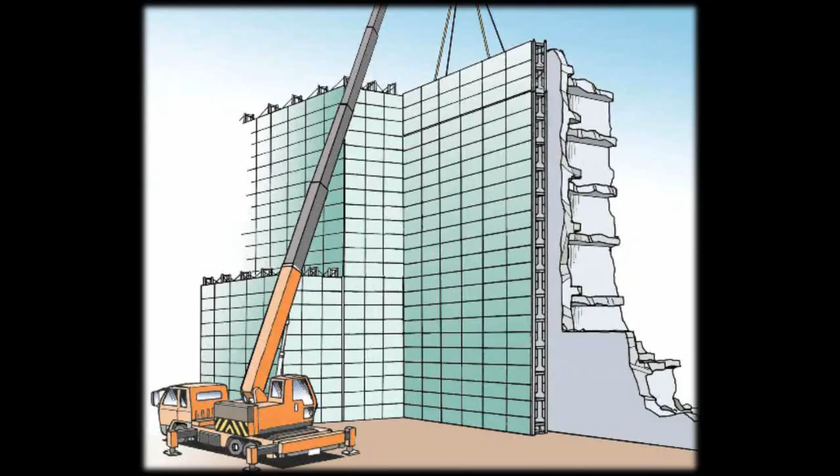A fall from scaffolding during work to disassemble framework scaffolding for protective covering. Accident or disaster situation. This is an example of an accident that occurred during work to disassemble scaffolding in the demolition of a plant.

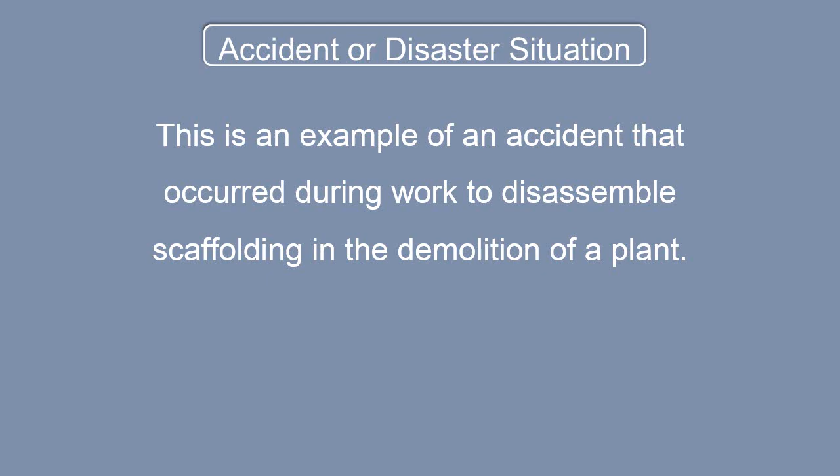During work to disassemble framework scaffolding for protective covering in the demolition of a waste incineration plant, the external connecting pin did not come out when lifting a 2-level 6-span unit with the soundproof panel kept installed on the outside. When the victim went to remove the pin, the last pin came out and the unit sprang up.

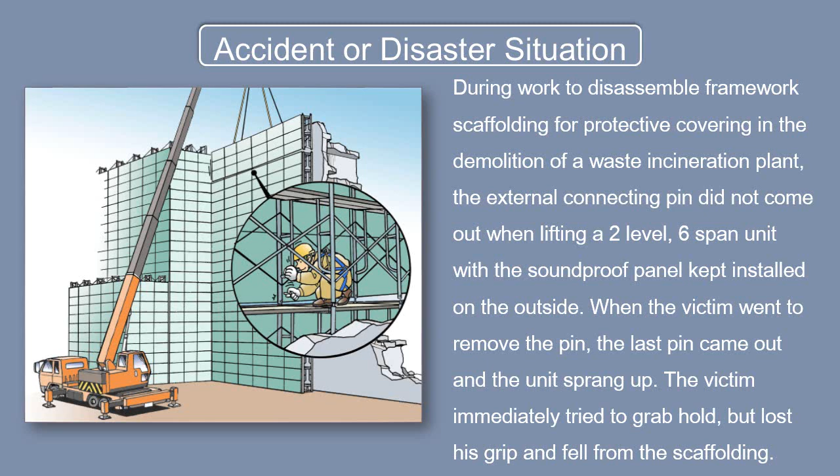The victim immediately tried to grab hold, but lost his grip and fell from the scaffolding. The victim was not using a safety belt.

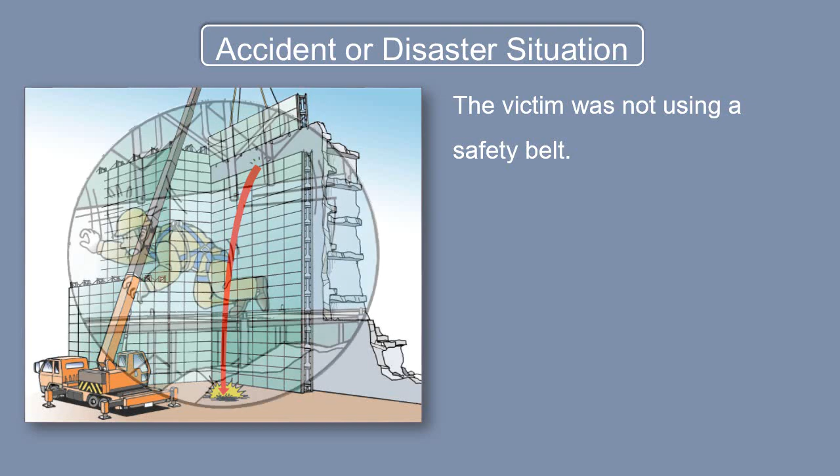During work to disassemble framework scaffolding for protective covering in the demolition of a waste incineration plant, the external connecting pin did not come out when lifting a 2-level 6-span unit with the soundproof panel kept installed on the outside. When the victim went to remove the pin, the last pin came out and the unit sprang up.

The victim immediately tried to grab hold, but lost his grip and fell from the scaffolding. The victim was not using a safety belt.

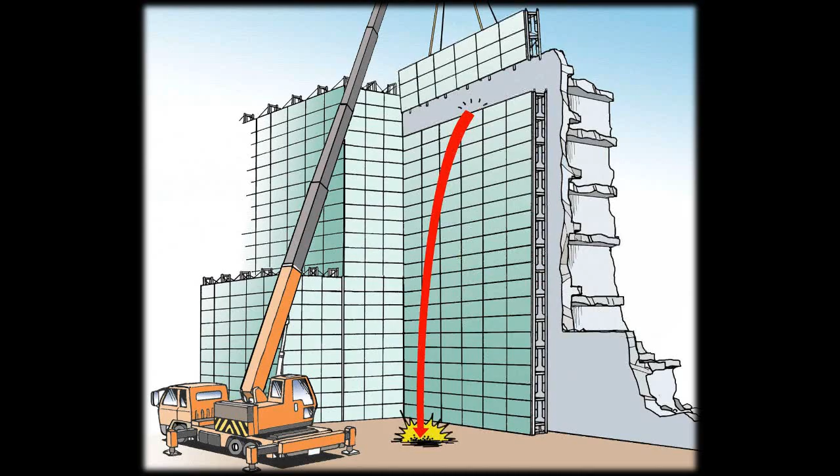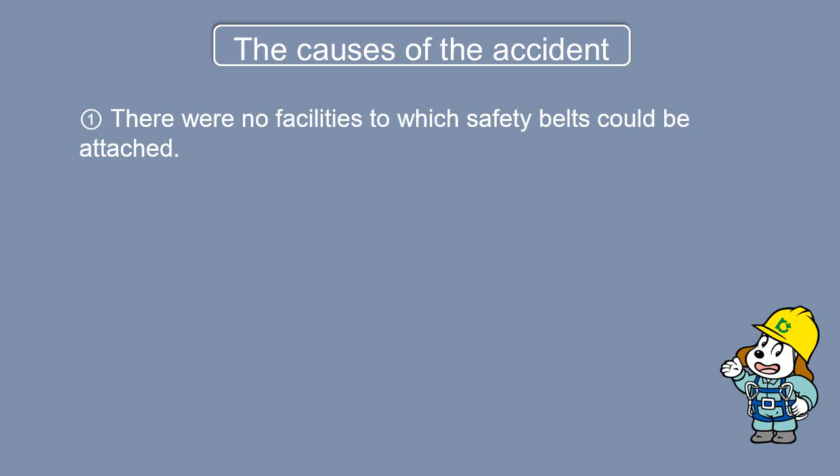The causes of the accident. There were no facilities to which safety belts could be attached. The soundproof panel was left attached on the outside of the scaffolding. There were deficiencies in the work plan and work procedure manual for the disassembly of the scaffolding regarding how to install the lifeline and the timing for its removal. The operations chief had overlooked unsafe conduct.

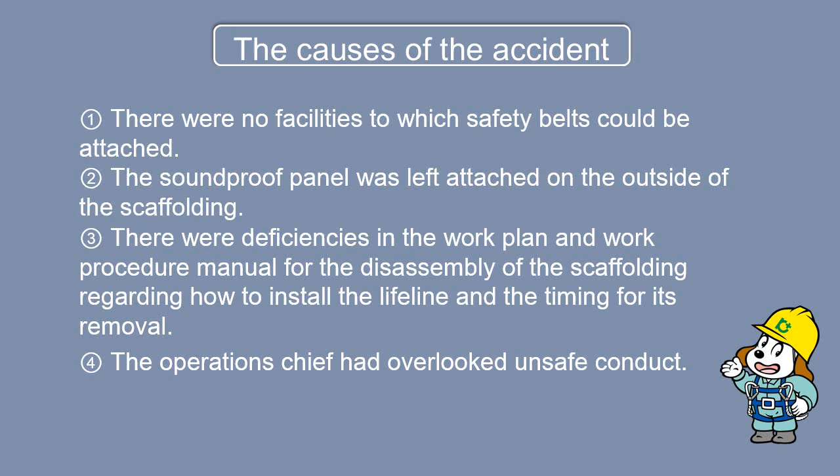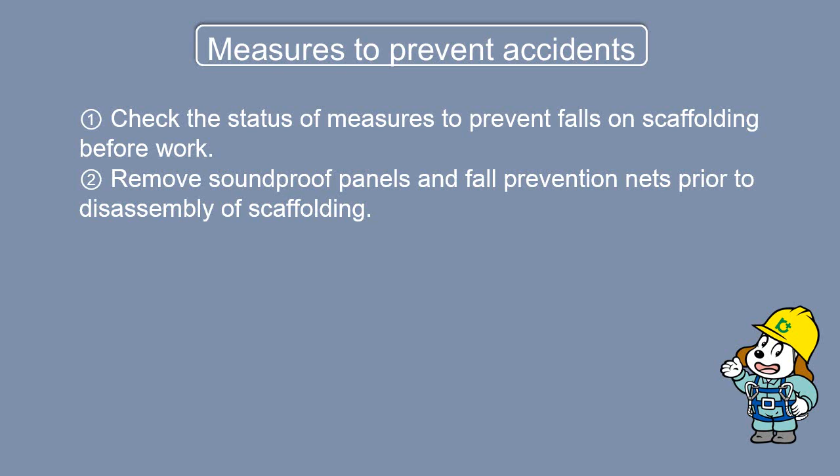Measures to prevent accidents. Check the status of measures to prevent falls on scaffolding before work. Remove soundproof panels and fall prevention nets prior to disassembly of scaffolding. Review the work plan and the work procedure manual. The operations chief will monitor unsafe conduct, including the use of safety belts, and supervise work directly.